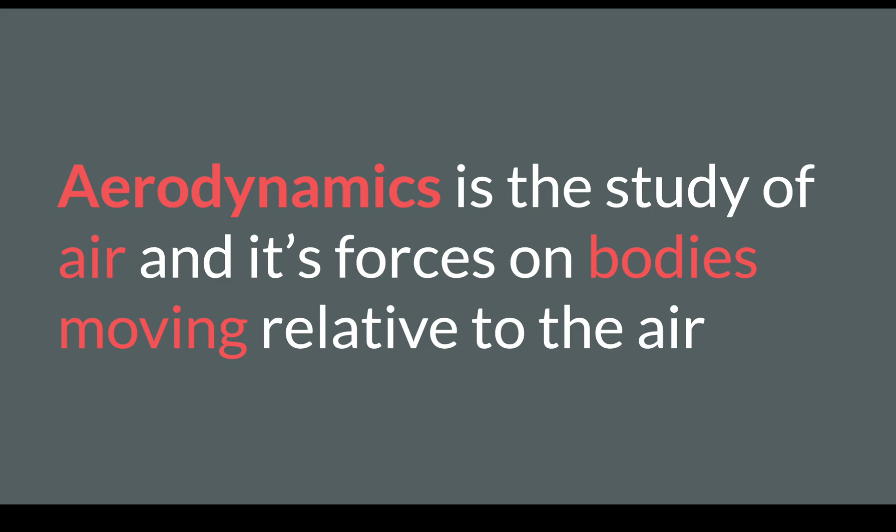So let's start with some basics here. We're talking about the four forces of flight. And since we're talking about aerodynamics, let's define aerodynamics. Aerodynamics is the study of air and the forces it has on bodies moving relative to that air. And we're going to learn about four forces of flight, how lift is created, parts of the wing, different types of drag, things like that.

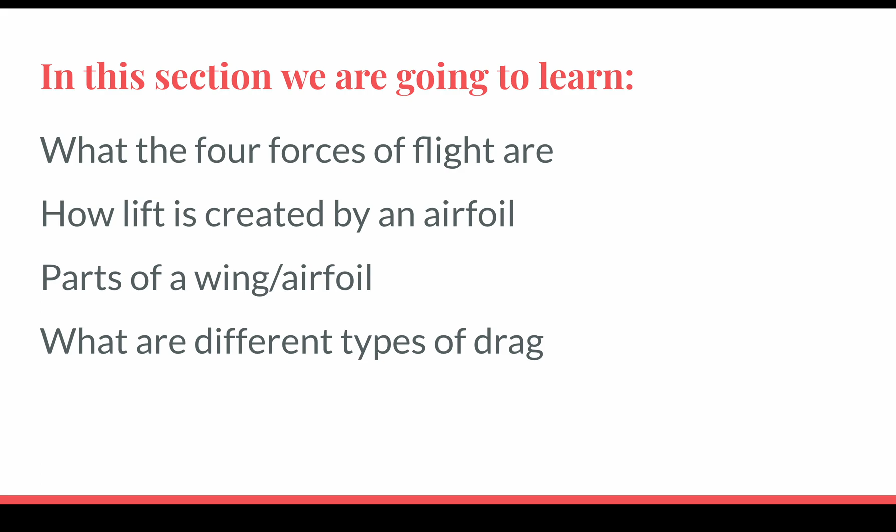So we're going to start with the four forces of flight. There's four of them: lift, weight, thrust, and drag. And you're going to want to memorize those four.

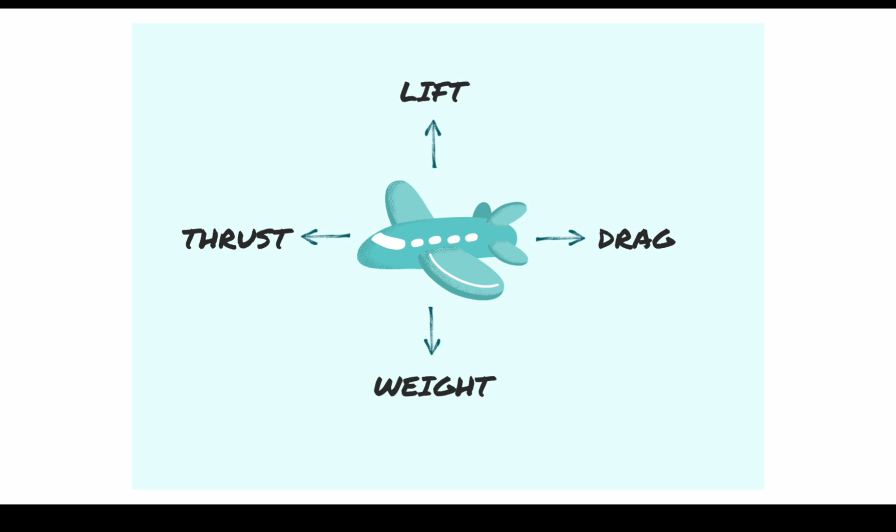So one fact that the FAA seems to want you to know all the time is the forces of lift, thrust, gravity, and drag are all equal when the aircraft is in unaccelerated, straight and level flight. Unaccelerated, straight and level flight. So what that means...

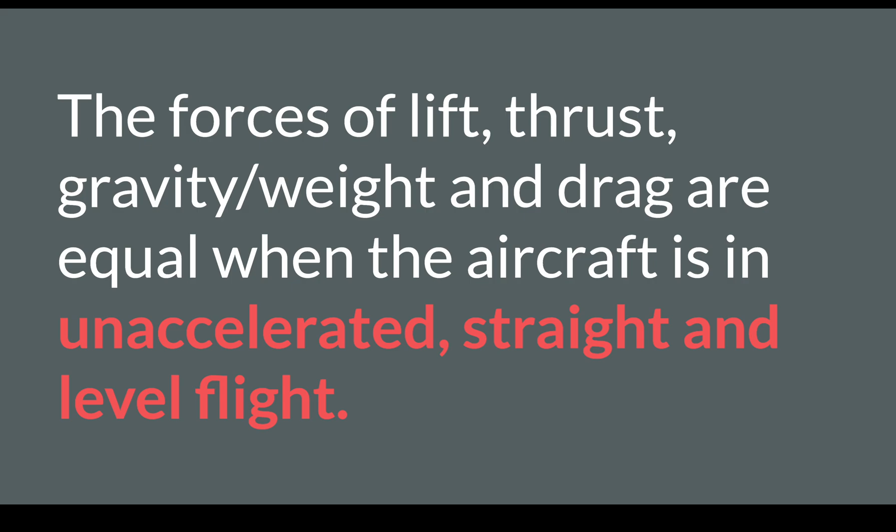Sorry, I had to grab my model here. So what that means is when the aircraft is just cruising along, it's not accelerating, it's not slowing down, it's not climbing, and it's not descending.

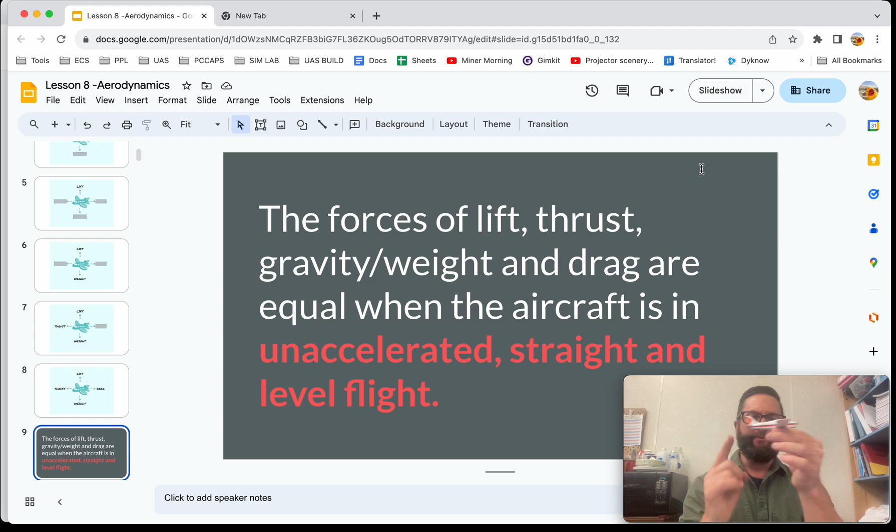When it's just cruising along, all those four forces are in perfect balance, so to speak, even though the plane's moving forward. And some people are like, well, doesn't thrust have to be greater than that? Well, maybe, but think about if you were in outer space and this was just floating and you just lightly pushed on it, it would start moving forward. It's kind of like what we call a glide or a cruise or something like that.

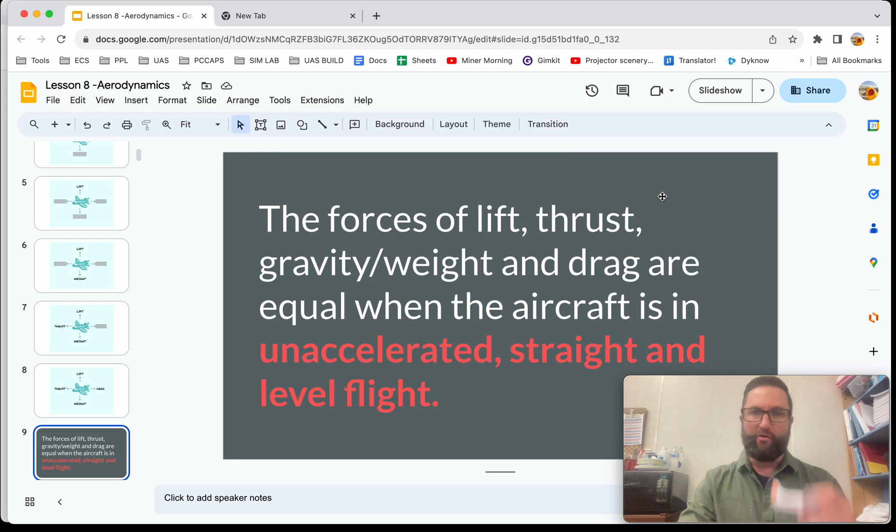So we want to make sure that we understand that when it's in unaccelerated straight and level flight, they like to ask questions on that on the written test and things like that. So you just want to memorize that statement there.

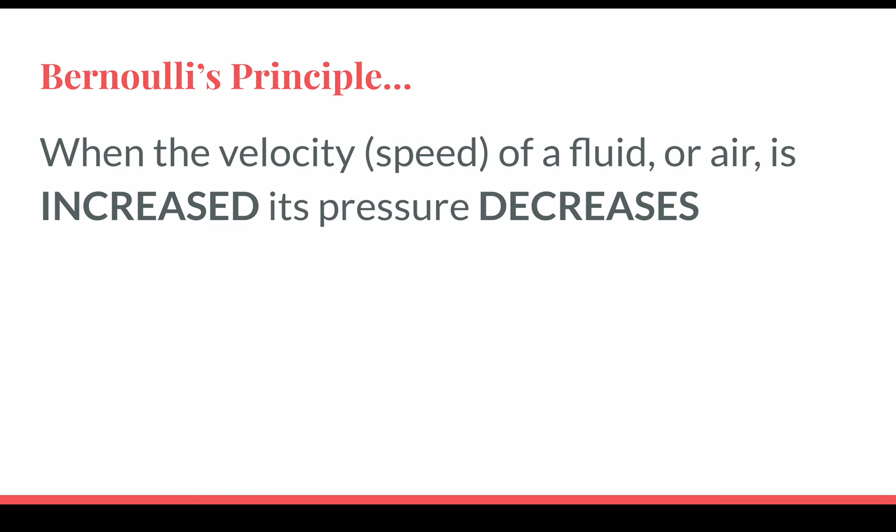So let's talk about lift to begin with. There was this Swiss mathematician named Bernoulli, and one of the principles he stated is when velocity of a fluid or air is increased, its pressure decreases. So how does that help a wing produce lift?

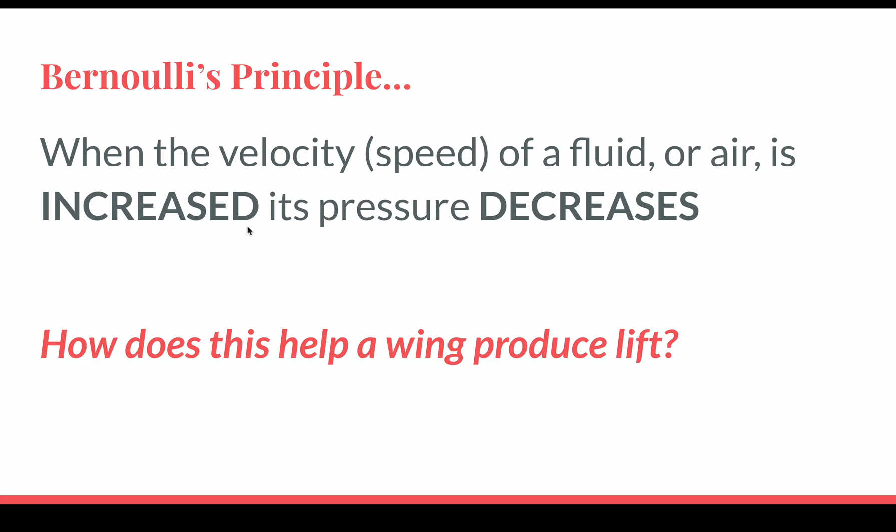So that creates low pressure up here, because when the speed of a fluid or air is increased, the pressure decreases. That means that the pressure is lower on top of the wing than on the lower part. So since this is going faster and this is going slower, there's less pressure up here and there's more pressure pushing up, which causes this wing to go upwards into the air.

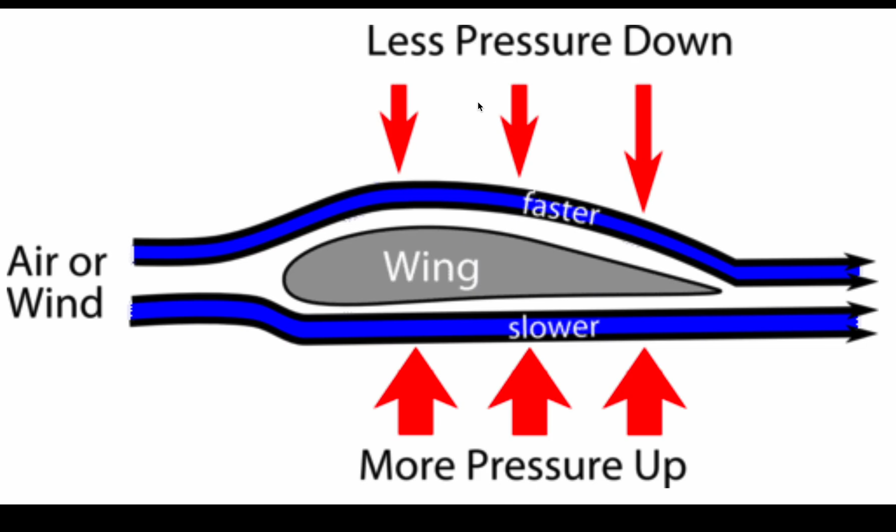Alrighty, so here's some terms we want you to know. This is what we call an airfoil. An airfoil is basically another name for a wing. A foil is like a type of sword that cuts through something. So an airfoil is something that's cutting through the air.

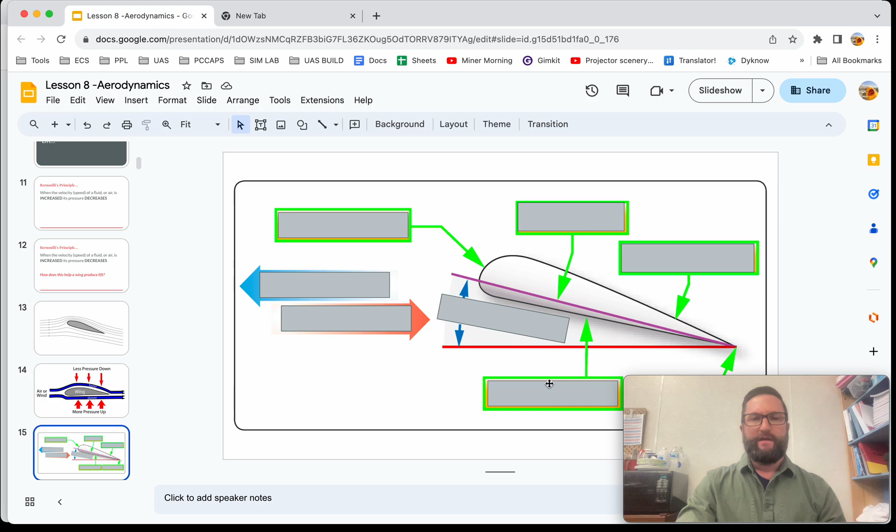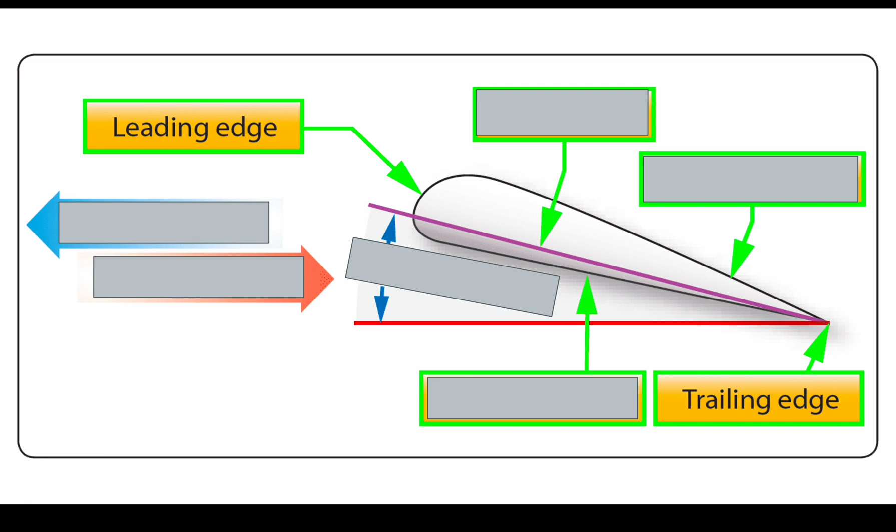So let's go over these parts and terms that we're going to use when we talk about airfoils. The first one is the leading edge, that's the very front of the airfoil. And then the back is the trailing edge. Then we have what's called the chord line, which is the imaginary line from the leading edge to the trailing edge.

So even though this purple line, we can see it, if you looked at an actual wing, they don't actually usually paint that on the wing. The type of curvature the upper wing has is called the upper camber. And that means that this down here is the lower camber.

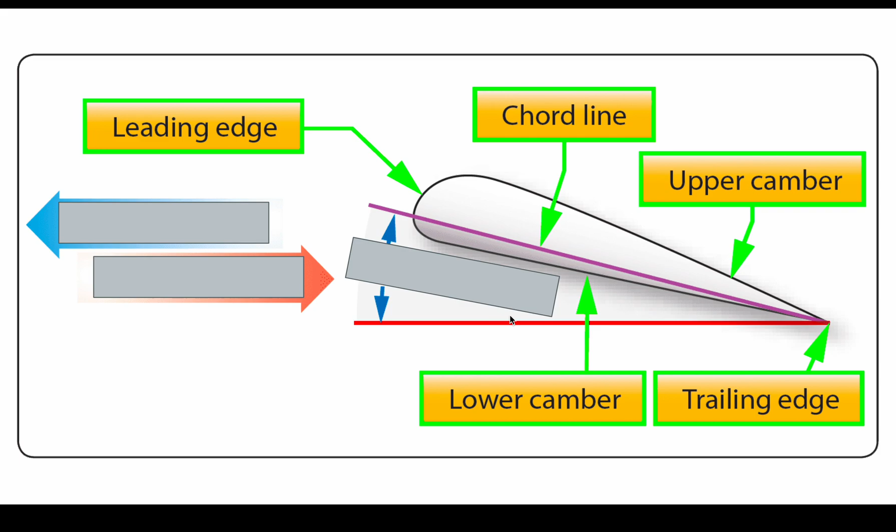Now these next three terms are ones that we're going to talk about quite a bit in depth. The first one is the airplane path, that's the direction the airplane is flying through the air. Then we have, directly opposite the airplane path, the relative wind.

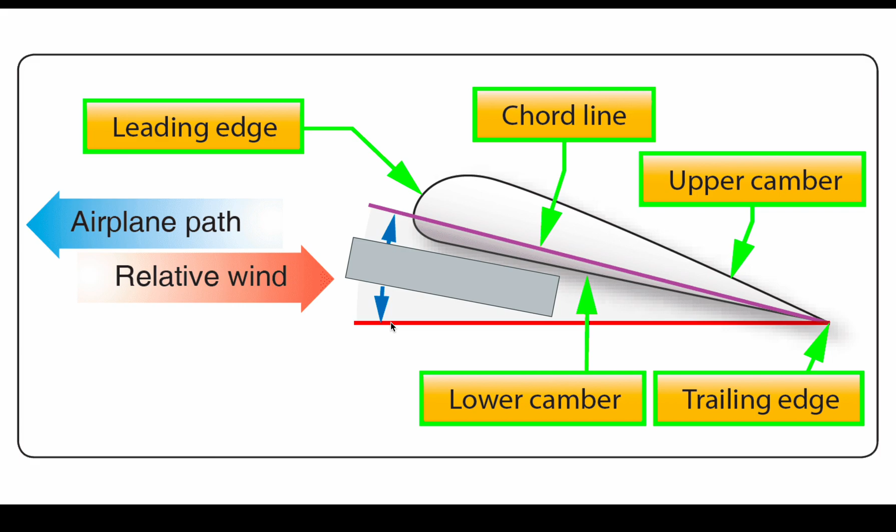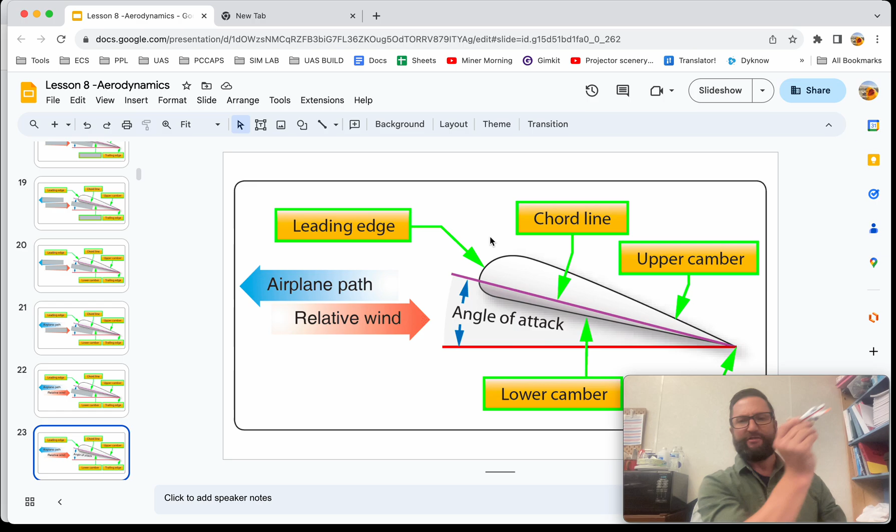The difference between the chord line and the relative wind, the red line and the purple line, is called the angle of attack. To put that simply with our model, the airplane is moving forward - that's its flight path. Even if it's pitched up but moving this way, its flight path is that way, which means the relative wind is coming from this direction. If it's going upwards, the flight path is that direction, and the relative wind is coming at it like this. So you always have to know where the airplane's flight path is in order to understand where the relative wind is coming from.

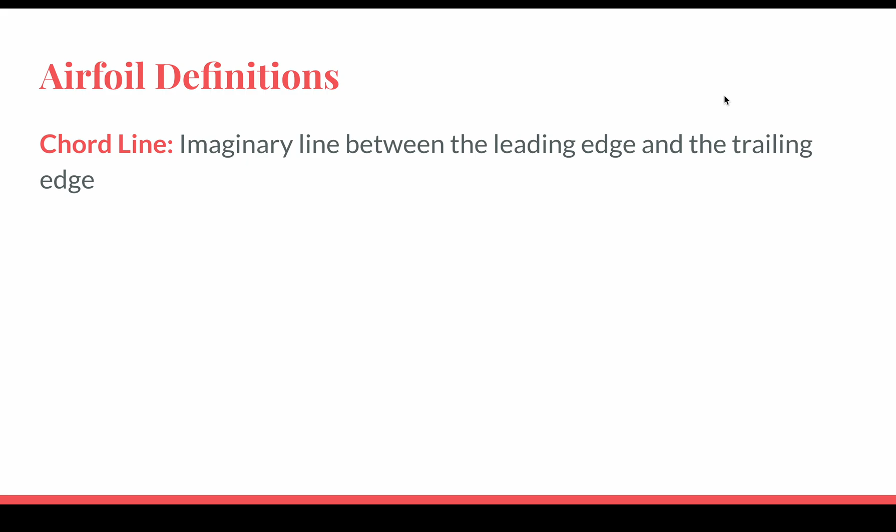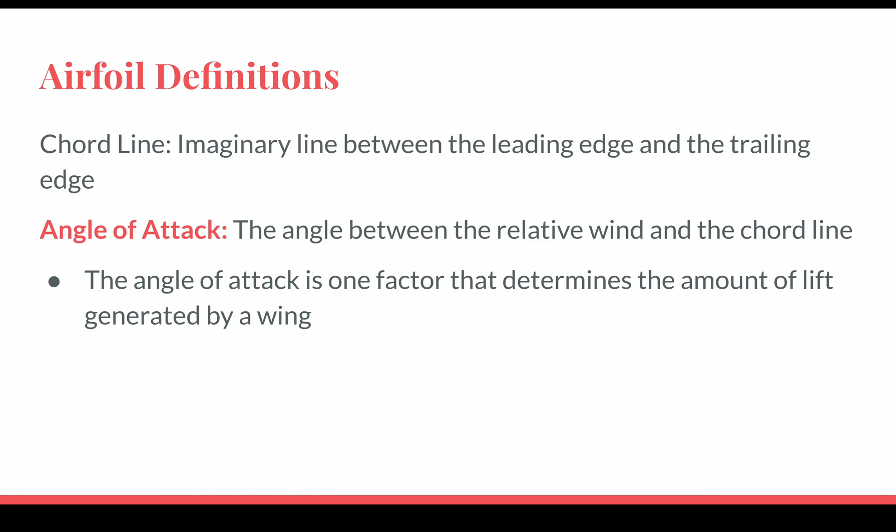Here's some definitions. Chord line: an imaginary line between the leading edge and the trailing edge. Angle of attack: this is the angle between the relative wind and the chord line. It's one factor that determines the amount of lift generated by a wing.

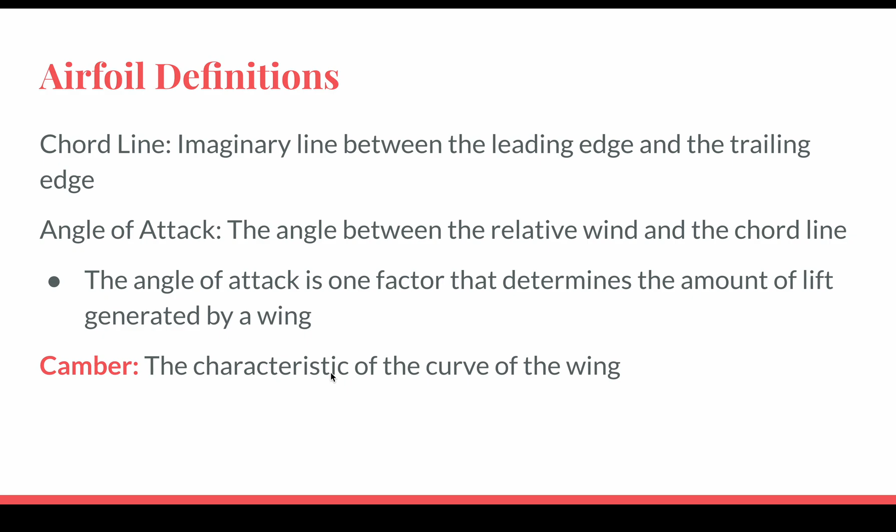The camber is the characteristic curvature of the wing. There's different camber for different types of operations. We'll talk about more of this in class, but if you have a kind of big, fat wing like this, that's meant for gliding - meant to generate a lot of lift, but it also creates a lot of drag. If you have something like a high-speed airfoil, you'll see that it's very different. These are both types of wings, but they're just used for different operations.

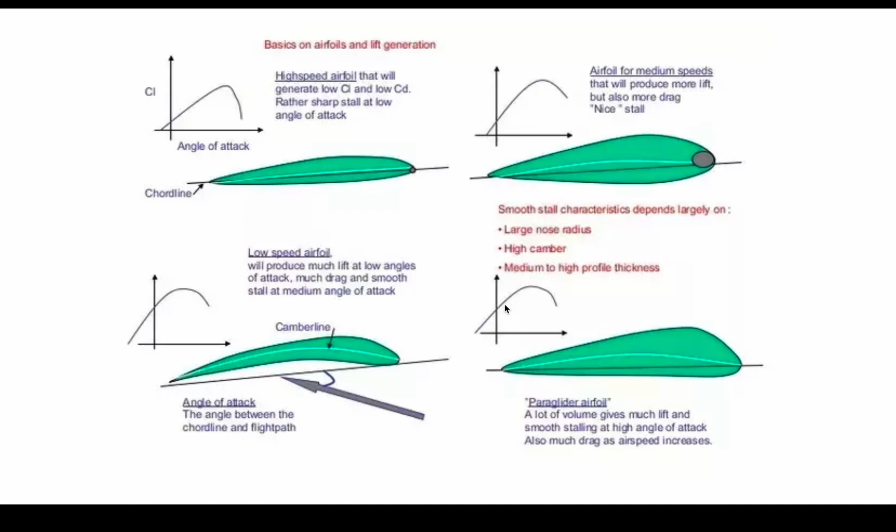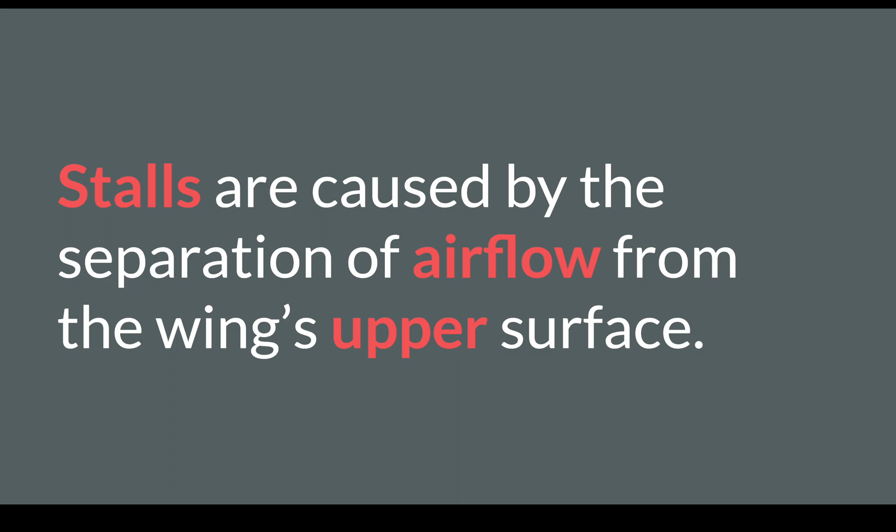One of the things we talk a lot about with private pilot training is something called stalls. Stalls are caused by the separation of airflow from the wing's upper surface.

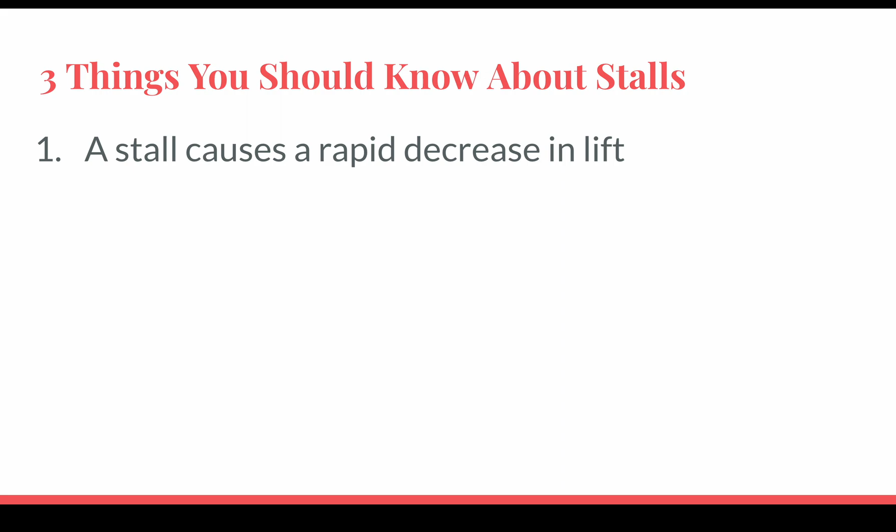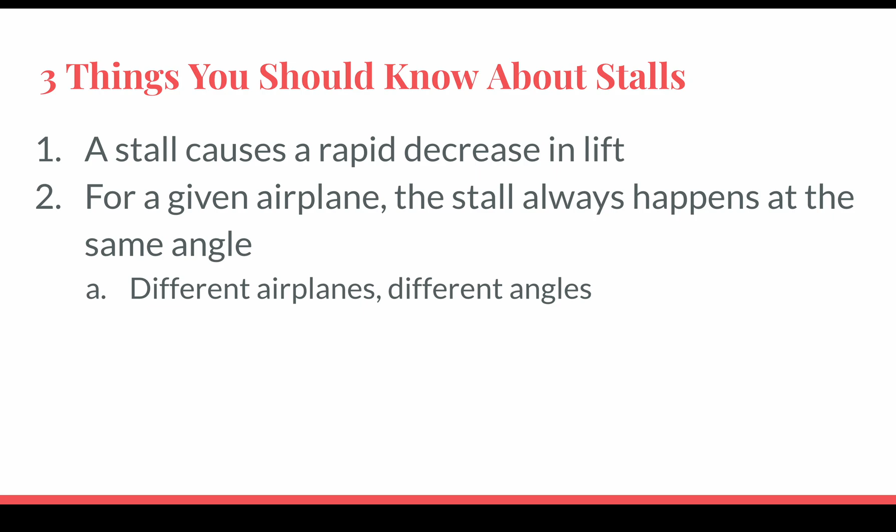Here's 3 things you should know about stalls. Number 1, a stall causes a rapid decrease in lift. For a given airplane, the stall will always happen at the same angle - different airplanes, different angles. We're talking about the angle of attack here. That angle is called the critical angle of attack, where it will always stall.

And this is the difference between the relative wind and the chord line. We've already talked about that a little bit. We're going to go into this in depth in class.

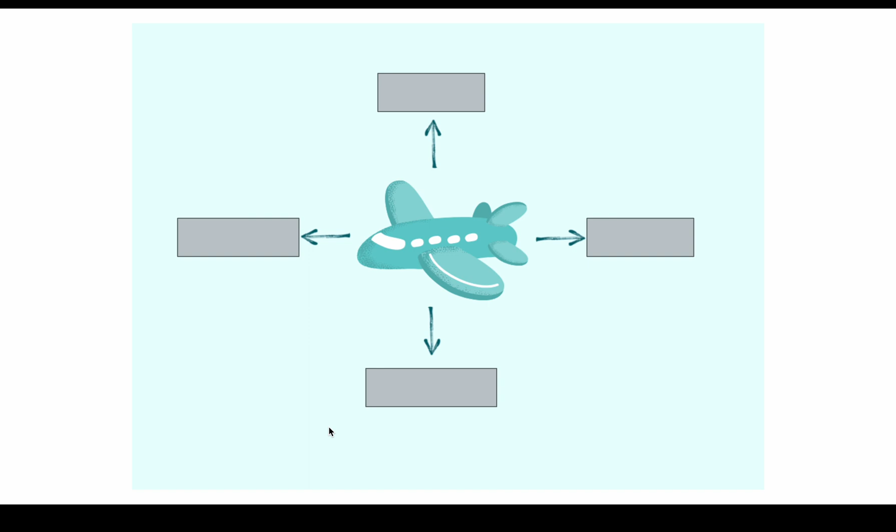Here's a real quick review of the 4 forces. And what was the answer to this question? Unaccelerated straight and level flight.

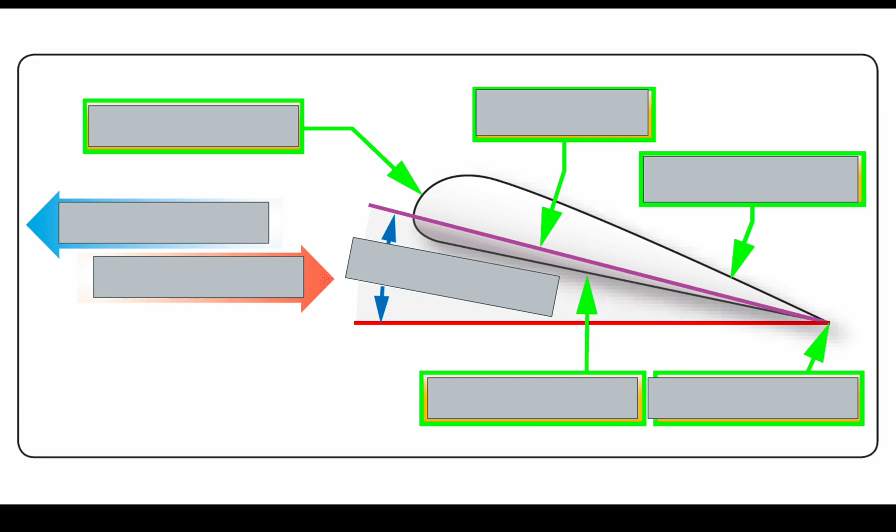We're going to go review these again, and we're talking about stalls again. Watch a video about stalls. All right, now let's get into some more talk about stalls here.

There are 6 types of stalls. Number 1, an approach to landing stall, or a power off stall. We'll talk about that in class.

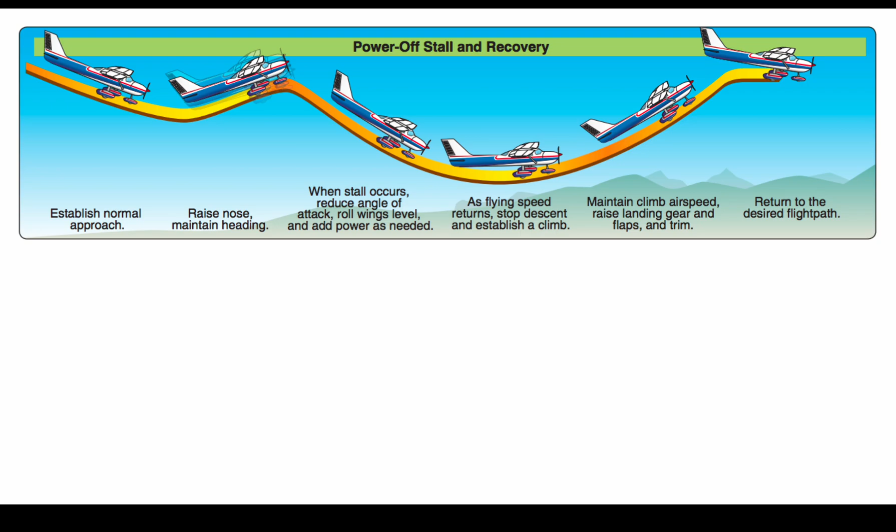Departure stall, or power on stall. We'll talk about that maneuver in class.

Elevator trim stall - too much nose up trim.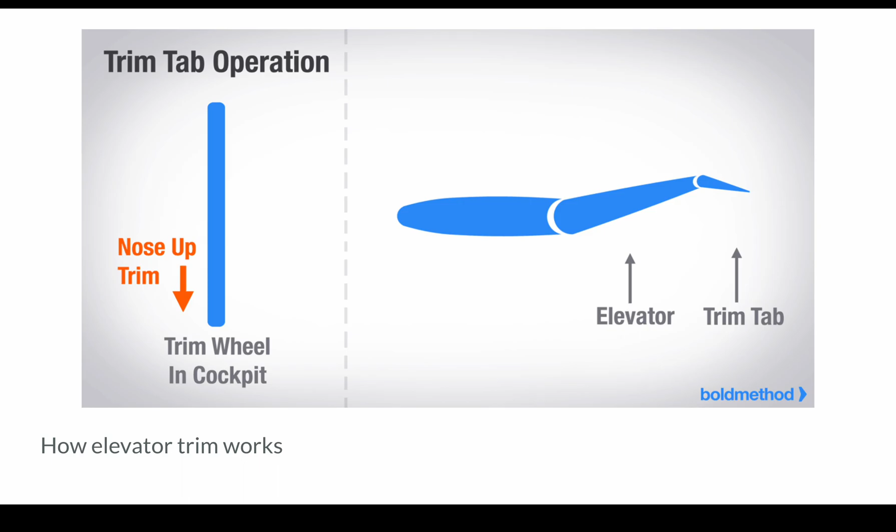Cross control stall, or a skidding turn stall. We'll talk about that one a little bit as well.

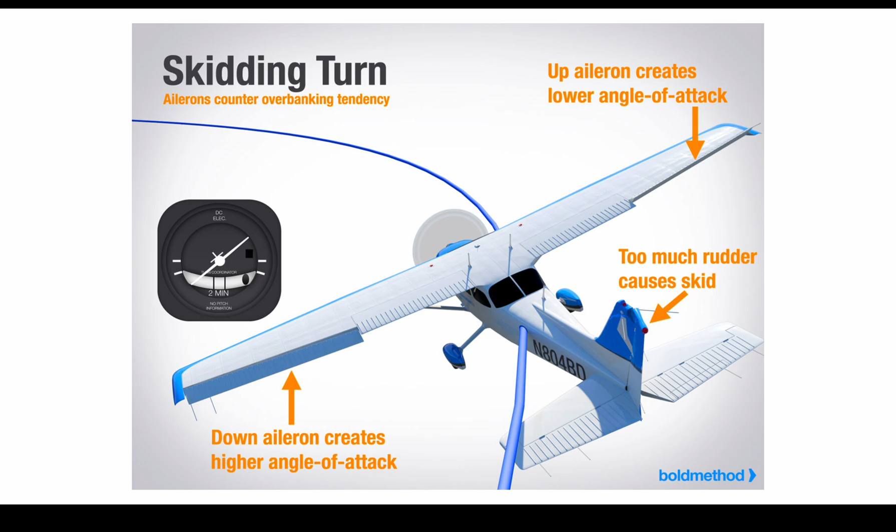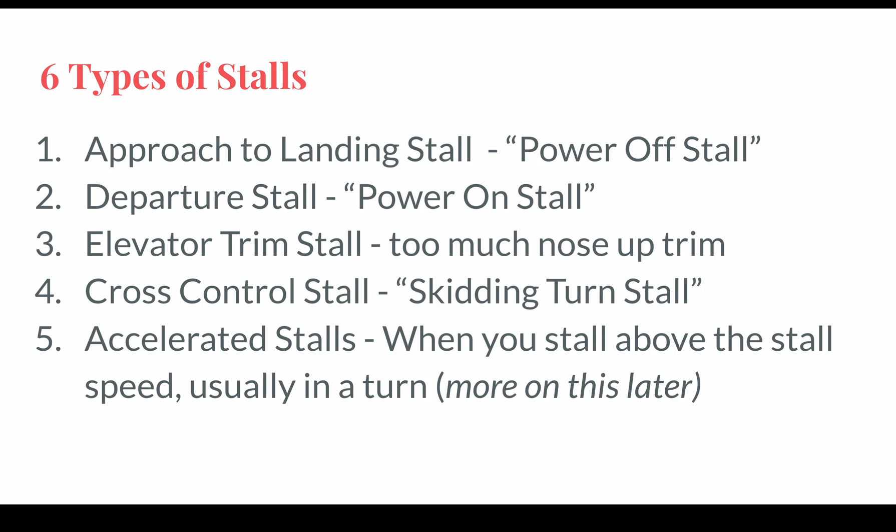And then finally, the last 2 are accelerated stalls. This is when you actually stall above what's called the stall speed, usually in some kind of turn where you increase what's called load factor. We're going to talk about load factor in this lesson 8 a little bit later when we get to weight.

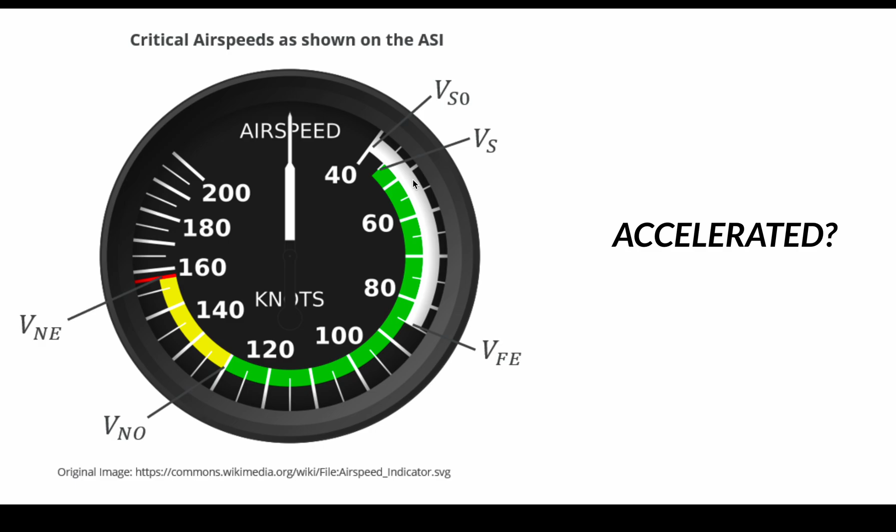An accelerated stall - typically the stall speed is going to be right about down here, either at the bottom of the green arc or the bottom of the white arc, depending on our configuration, flaps in or flaps out. If it's accelerated, it's basically happening somewhere up here in the arc, above that stall, what should be the stall speed. We're talking about why that is later.

And the secondary stall - you stall and then you stall again right away. We're going to talk about all those stalls more in depth in class, so don't worry about them right now. Just kind of get them written down in your notes, so when we're talking about it, you can focus on what we're talking about.

How do you recover from stalls? Well, if the problem is that the plane has reached a critical angle of attack and it's stalling, you just want to lessen that angle of attack. So really, in most cases, you're just going to lower the nose when you are recovering from that stall. You just return the aircraft back to a lower angle of attack.

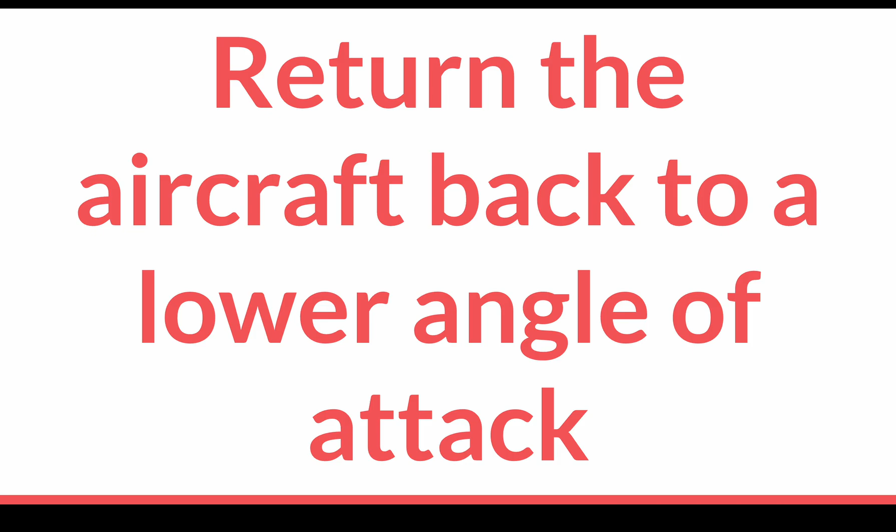Remember, center the ball when you stall. We'll talk about that later, but if you don't have it coordinated, you could put the plane into something called a spin when you stall it.

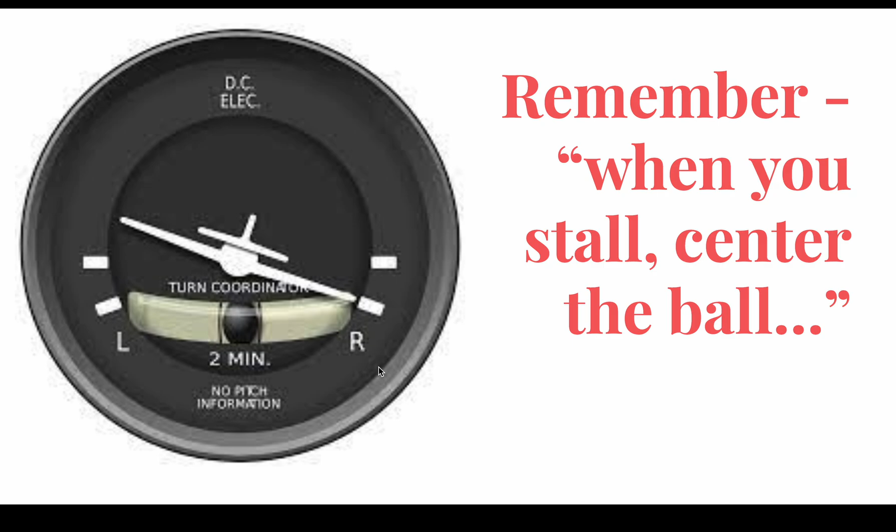You can recognize a stall by slowing airspeed, buffeting - the wing will start to shake a little bit. The stall horn is going off when a stall is imminent. Nose dropping, sudden loss of altitude.

The stall recovery is: lower the nose, release the back pressure, level the wings, center the ball, and add power if you don't have power already in. We'll demonstrate these on the simulator in class.

And that's the end of lesson 8.1. Make sure those notes are filled out and be ready for class.